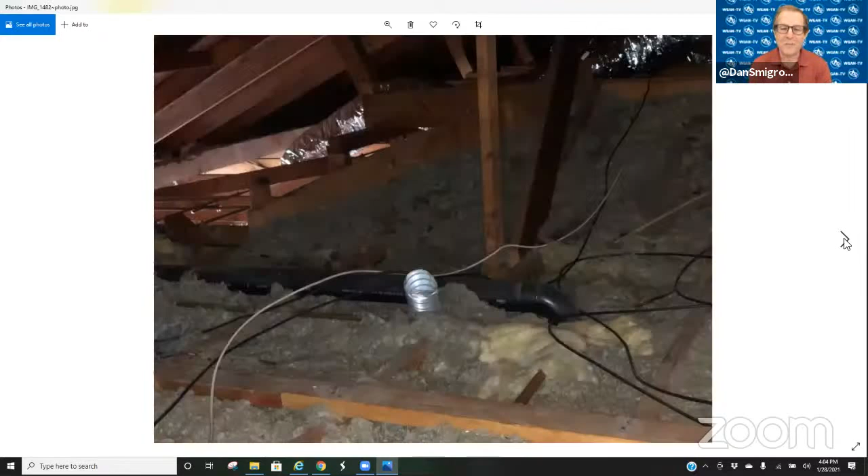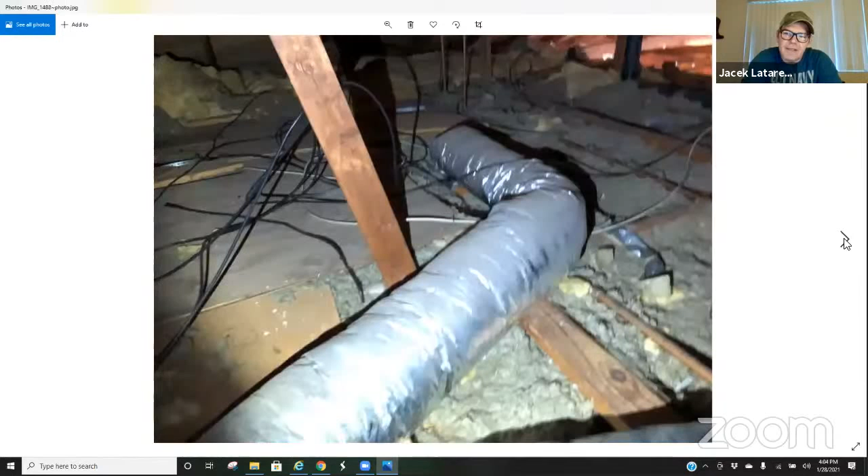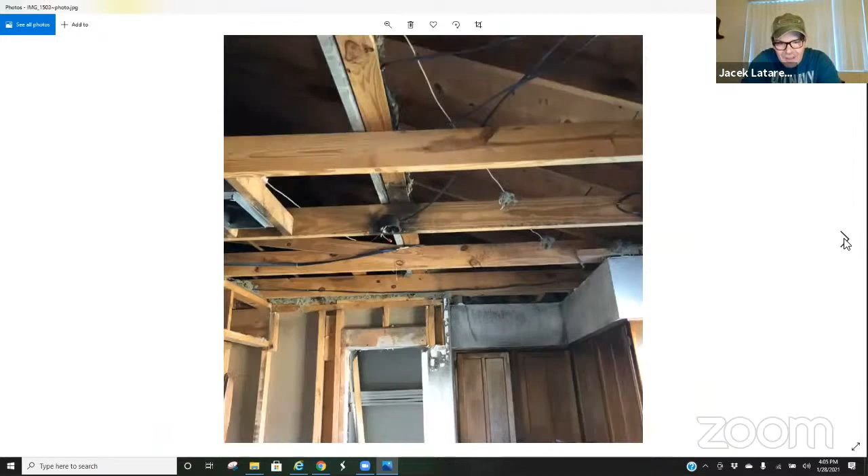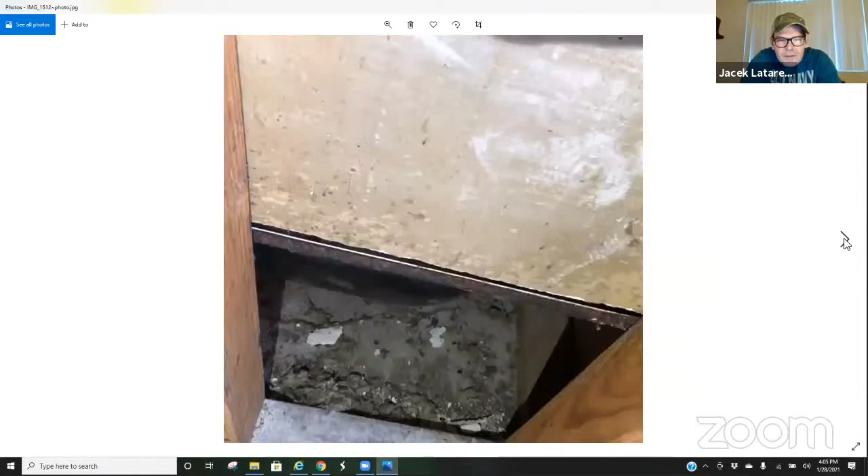What strikes me looking at these pictures is you can't tell the relationship between one photo and the next, or one space and the next. That's correct, Dan. It's basically like putting a puzzle together. You take all the pictures, then go back to the office and try to put it together. If you don't have a lot of experience, you're not sure what's connected to the next. It's very difficult to do it this way because it's specific to a specific section. And how do you know what you need to do? It's difficult - you zoom in on photos. So that's great, we can see a lot of pictures.

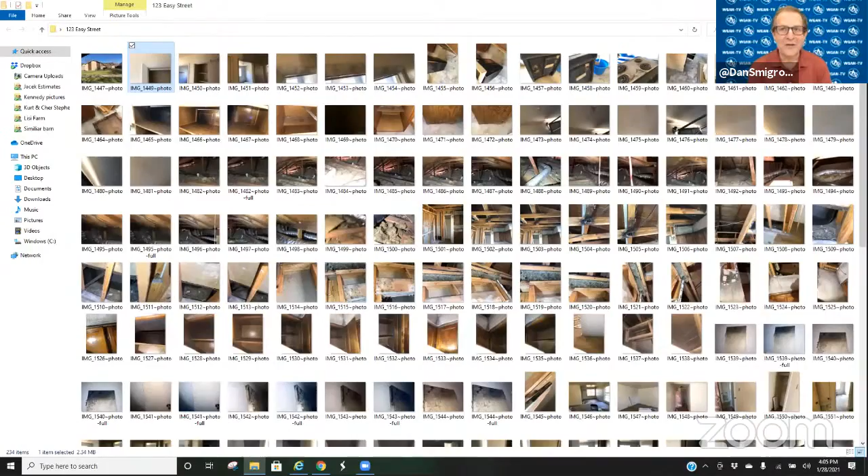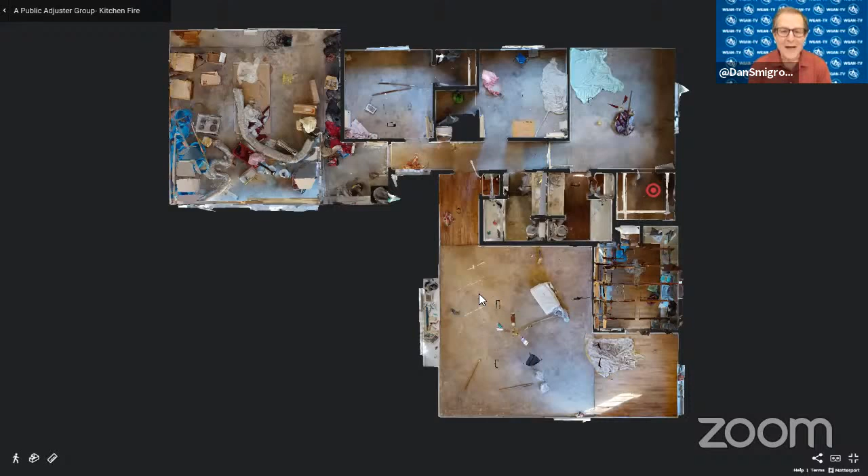While you might know how to put all those pieces together to form a picture, I think for a lot of us it's like, oh my gosh, that is such a crazy process for documenting something. Certainly as Matterport service providers - in fact, let's take us into the tour. This is an example posted on the We Get Around Network forum, WGANforum.com. So we're now looking at a Matterport digital twin of the same space as those 2D pictures.

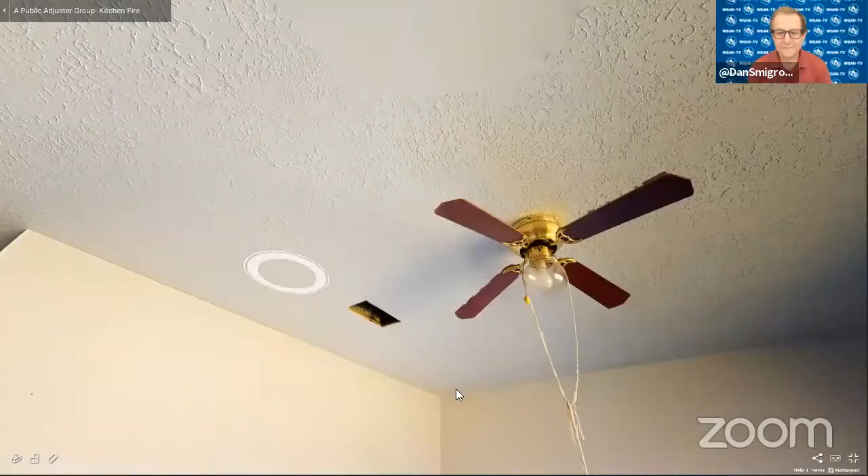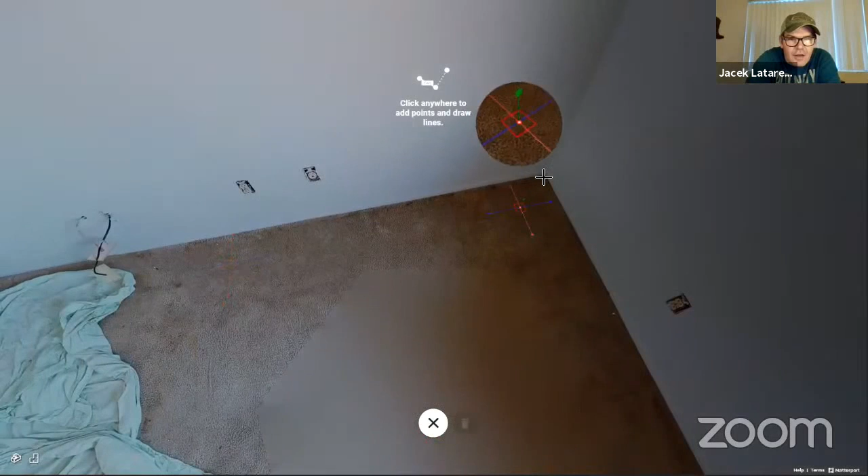That's correct. So now let's jump into a room and look at the difference. It's amazing - you can basically move around the space, look at everything that you need. You can pull out a tape measure if you like, take a measurement... now you have a measurement.

So usually when you scope a loss, Dan, would you like me to start scoping, going through the rooms and taking notes? Let's maybe look at the dollhouse just to get an overview of the house, and then maybe we could fly into where the fire damage in this house actually took place. Okay.

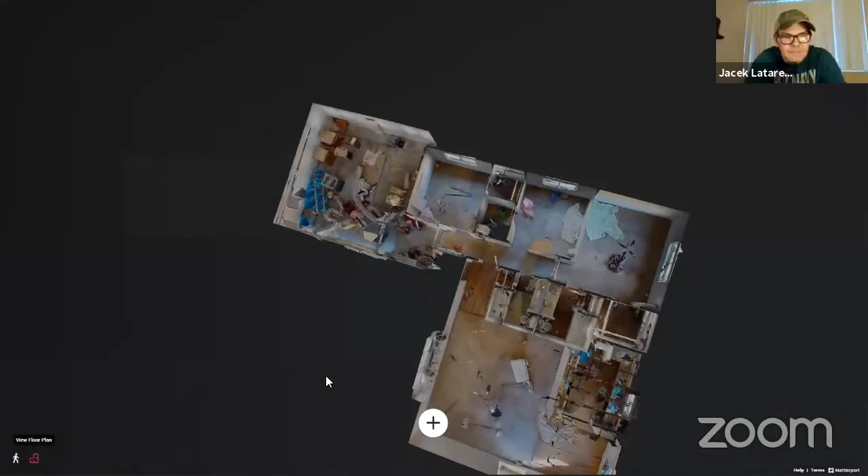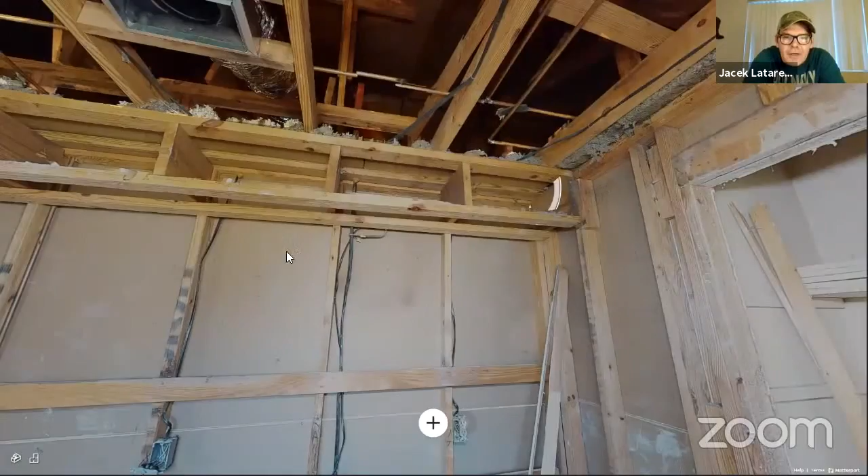Okay, so this is a kitchen fire. This is the fire. And as you can see, for an estimator, now you're able to look at everything in the space. So I would say, Jacek, when I look at this picture of fire damage of this kitchen, I go, where do you possibly begin to understand how much it's going to cost for not just the remediation, but the renovation to bring this space back to what it was?

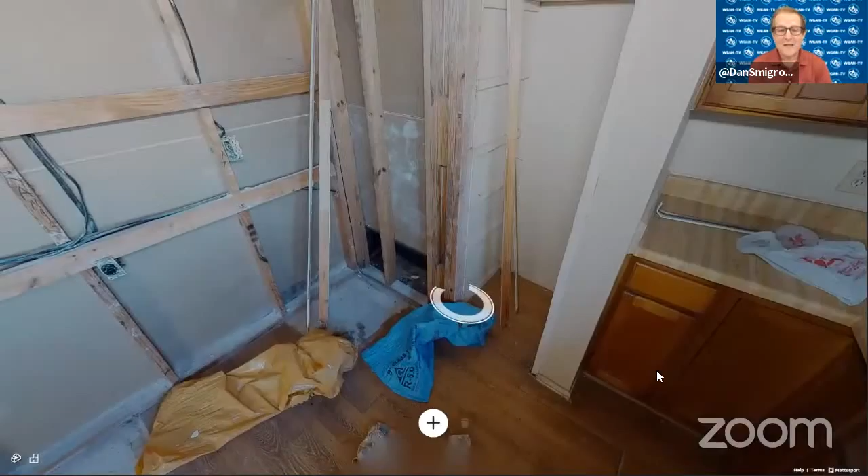So maybe if you could start with the ceiling, and just when you see this picture, what do you see as an insurance adjuster doing insurance adjusting? Okay, so the first thing I do when I walk into any project, any claim, I start with the ceiling first. I go to the walls, then I go to the floor.

And you basically look at the ceiling and you start taking notes. So let's stick with the ceiling for a moment, okay, Jacek. What is it that you're looking at? What in your mind? What is it you're starting to write down for an Xactimate plan?

And we'll show and tell on the Xactimate. But let's start with you're looking at the ceiling. What are all the different things that a general contractor can get reimbursed for that you need to document? Okay, I need to document.

So let's start with the ceiling of what I would be looking at. I'm looking at the light fixtures. So I'm writing down there's a light fixture here, two light fixtures. I'm writing that there's a vent. I'm writing that I'm looking at what kind of roofing system it is. I'm writing down the joists because for drywall.

Everything that you would see on the ceiling, because a picture will only give you part of a ceiling. Now, what if you didn't take a picture of this section right here? Now you just missed the light fixture. Or if you didn't take one of the vent, you missed the vent. So there's two items there that you missed.

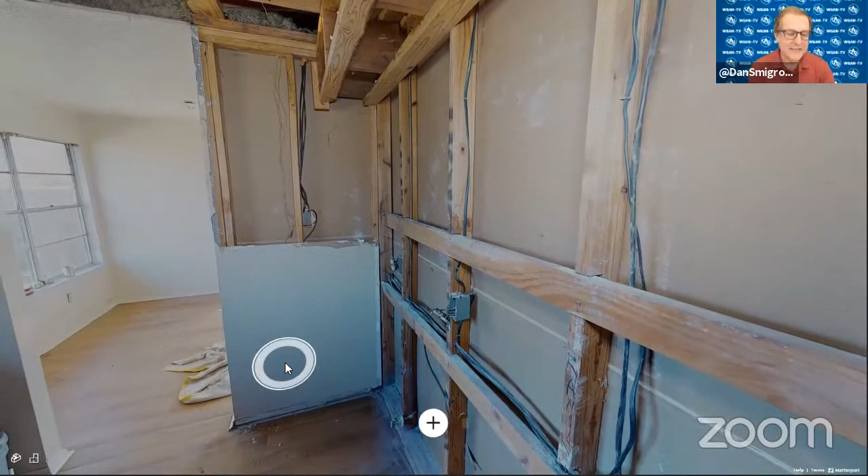But you know what I think is interesting here, Jacek, because you're talking about pulling out the tape measure. I know that this Matterport tour is courtesy of a Pearland, Texas-based public adjuster group LLC, Randall Smith. And interestingly, you're in Omaha, Nebraska. He's in Pearland, Texas. And you have everything you need with this Matterport tour to do your Xactimate adjusting.

Exactly. That's what's amazing. I mean, if you think about it, normally for me to fly from Omaha to Texas would cost money. I would have to stay in a hotel, go to the job site, scope it, take notes, take pictures, go back to the hotel room or fly back home, then gather all that information again and redo it. With this, I can do it from home, office, anywhere, and walk through the space. That's what's absolutely amazing to me about this technology is that you can do everything from home.

Let's say I have a cabinet that I don't understand, or if someone doesn't understand something, now you can share that with someone. You can send it, call a cabinet shop and say, hey, I have a cabinet, I'm not sure what this is. Can you tell me? Email it to them. Now they'll be able to tell you what you have. You basically take the expert out of the person, and now you can share it with someone who actually knows and understands it.

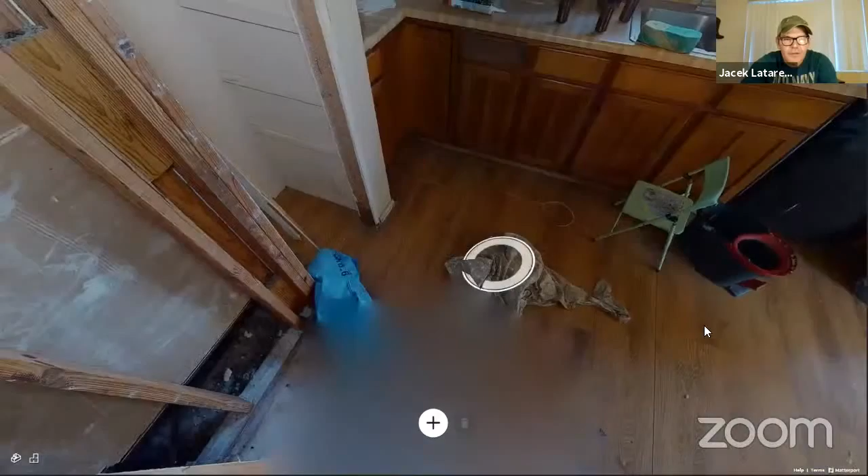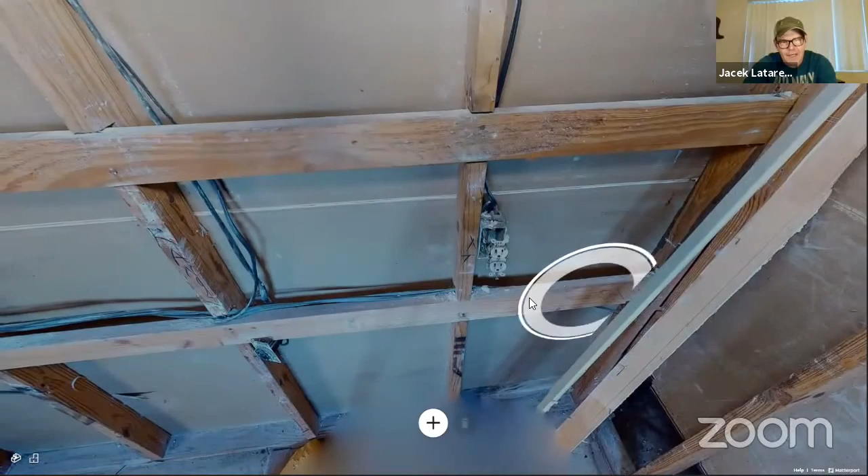So then you have a pantry. What if you didn't measure the size of the shelving in the pantry? Now you can measure it. How many are there? There's 1, 2, 3, 4. So I know there's 4 shelves in here. If you took a picture of only the bottom 2 sections, now you just missed 2 shelves above it. Or if you didn't take the notes, that's what's cool about using Matterport, is now I can see everything in the space. It's like I'm there.

What about doors and windows? Okay, doors and windows, same thing. So we're in the kitchen, I think there's a window. Boom. When you look at that window above the sink, I see a window. What do you see?

I see a window, but what type of window is it? Is it a horizontal slider? Is it a single hung, a double hung? How's it installed? Do I need to take the siding off on the outside if it needs to be replaced? Does it have a flange on it? Is there a blind? Is there a curtain on it? These are all items. How's the window finished? Is it drywall wrapped? Is it a cased opening? Does it have a windowsill? And now I can look at the window and know everything I need.

So I know it's a drywall wrapped window. I see that there was a blind here. And if you took a picture, if you had a picture of it and only took a section of it, you're not going to see the rest of it.

Same thing with the doors. What kind of door is it? Is it a 2.4, a 2.6, a 2.8 door? What's the swing on the door? Is it a left swing, a right swing? Is the door a hollow core, a solid core? Is it a 6-panel door? There's just a lot of detail that you need to know when you estimate, so you do it accurately, because there's a lot of choices that you can pick.

Same with cabinets, the drawers. You have drawers that are dovetail. There's different grades of cabinets and different parts and accessories that you have, and a picture just does not tell you that.

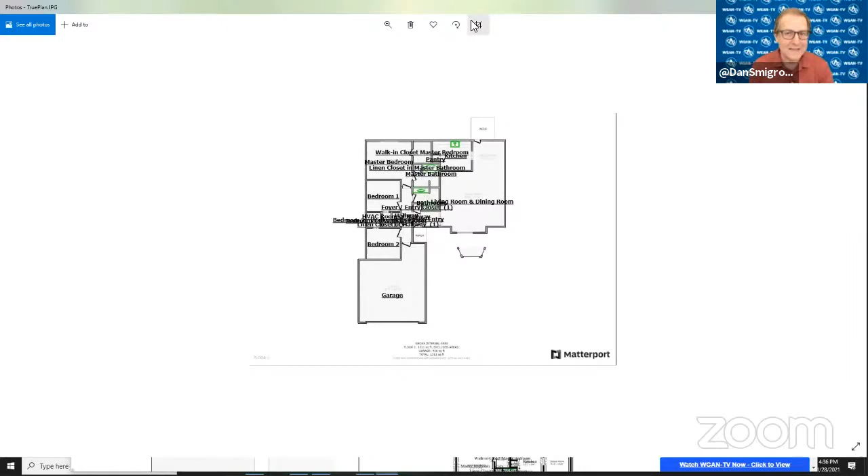So I think for a Matterport service provider, what we're learning here is that the Matterport digital twin, in this example a house fire, Jacek literally did a sketch that had 60 plus different line items just for the kitchen, identifying those 60 plus within 10 plus categories. Jacek went through the ceiling, the walls, doors, windows, cabinets, appliances, plumbing, baseboard, floor, and then items for odor and cleaning. There's actually an item for, I want to say, 2 other items—one was profit and one was overhead and profit. Overhead, a line item for overhead, and a line item for profit.

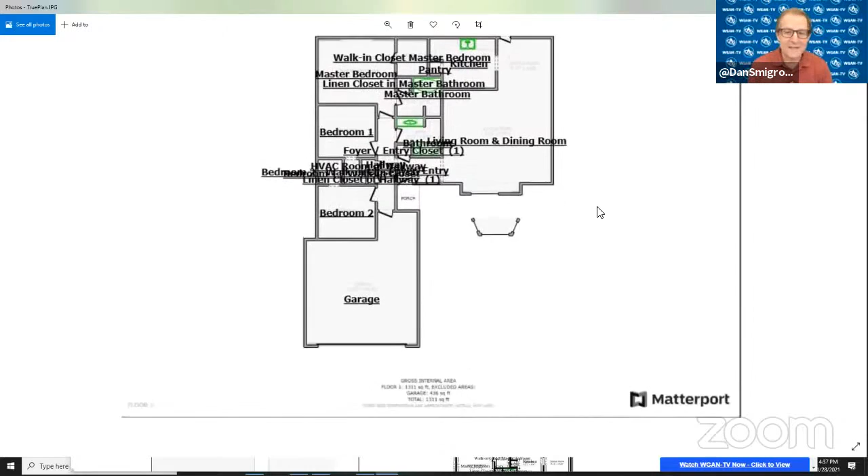So every one of these things needs to be identified. And this, what Jacek is going to show us in terms of Xactimate—there are 20,000 plus line items in this Xactimate program. And when you get an experienced adjuster like Jacek, who can really identify every one of those things, he sees money. So that means the Matterport digital twin has huge value to a lot of constituencies. We'll talk more about that.

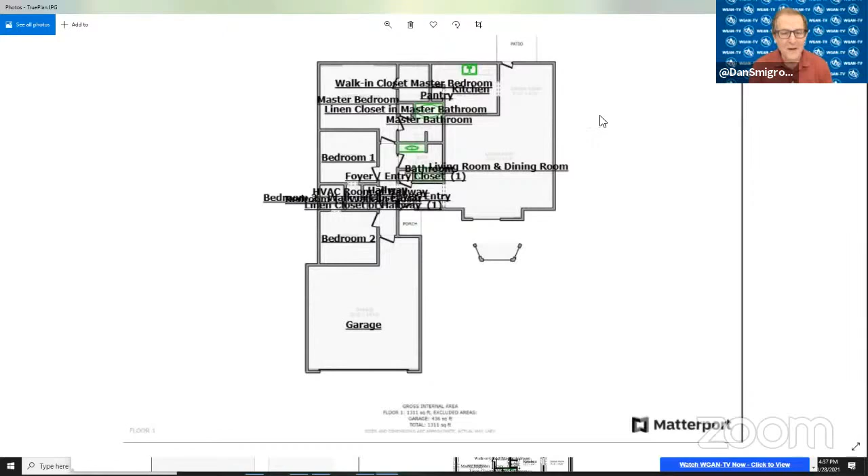And then you say, okay, well, Jacek has identified all these things. What does he do with it? I think that's probably a good time to talk about what we're looking at now, Jacek. Okay, can you see the sketch, Dan? Yes. Okay, so this is an example of a sketch.

With TruePlan now, you can import this right into Xactimate. You do not have to measure any loss, which is amazing, because not everyone sketches right. If you knew the struggles of sketching for people—think if this took you, let's say 2-3 hours, or some people might take 4 hours, or some can do it in a half an hour. It just depends on your experience, but we have accurate data.

Now you can share this with your carpet installer. You can share it with your painter. You can share it with your drywaller. You can share it with your window guy, your cabinet guy, everyone. And everyone has the same measurement that's accurate.

You're not different—if you took 100 people into this house, you would get 100 different measurements of everything, and no one would come out with the same measurements for everything. Everyone wants to measure their own because they don't trust the person who measured before them. And they just, because you have to have it accurate.

You got to think, carpet comes in 12-foot rolls. If you write down that a room is 11.2, and the carpet company goes off your measurement, and that room is actually 13 feet, you're going to be short because you got to have a seam now. So there's a lot of things that it affects, a lot of trades in a lot of ways.

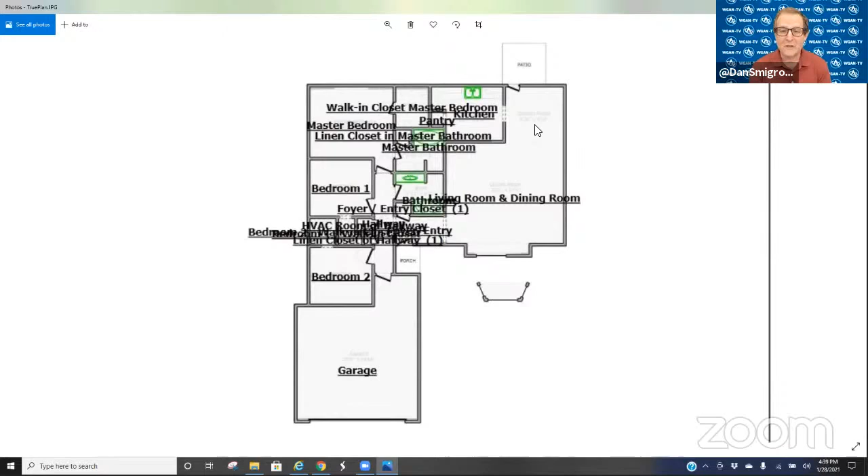Jacek, was there anything—I was going to take us off screen share unless there was something else you wanted to show us on this sketch. On the sketch? What else would you like me to show on the sketch? Okay, yeah, we can stop there. That's fine.

I would like to run through the bathroom if we can later. Yeah, we can do that. Let's do that in a moment.

What I want to be able to say is we've kind of looked at the Matterport digital twin, and I think it's helpful as a Matterport service provider to understand that the people who do remediation, the people that do the renovation, the general contractor, the insurance adjuster, a public insurance adjuster, if there's litigation, the lawyer doing litigation—they're all working off of this Xactimate tool, a platform.

And this Xactimate is required by the insurance company in order to get reimbursed—to reimburse the homeowner or reimburse the general contractor for doing the work.

Super exciting news: as of today, Thursday, January 28th, 2021, Matterport has just exited its Matterport TruePlan service into public beta. That TruePlan service creates a file format called ESX, and that ESX file can be imported into Xactimate.